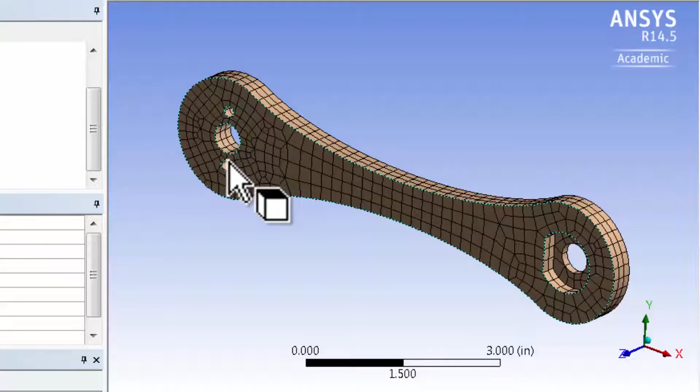I expect the regions where I'm holding these holes fixed to be areas of concern where I'm going to get stress concentration and high stress gradients. So if I zoom in over there using the right mouse button, I see that...

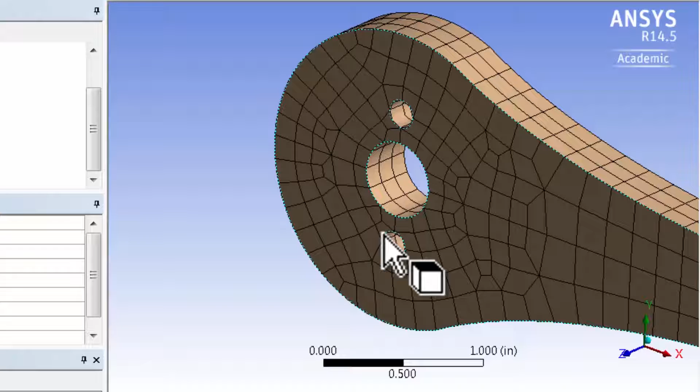Perhaps I can use a finer mesh around these holes, particularly the smaller ones. I'll do that by applying a sizing to these three surfaces. So click on Mesh Control, Sizing.

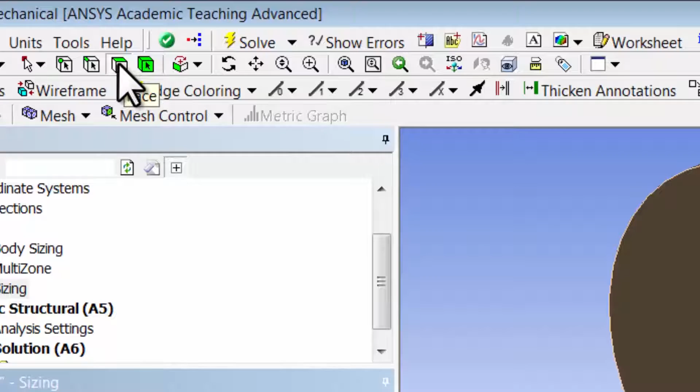We'll apply the sizing to faces or areas rather than the body as we did before. Make sure the face selection filter is selected, and then you can go and select which faces you want to apply the sizing to. So let me select that face.

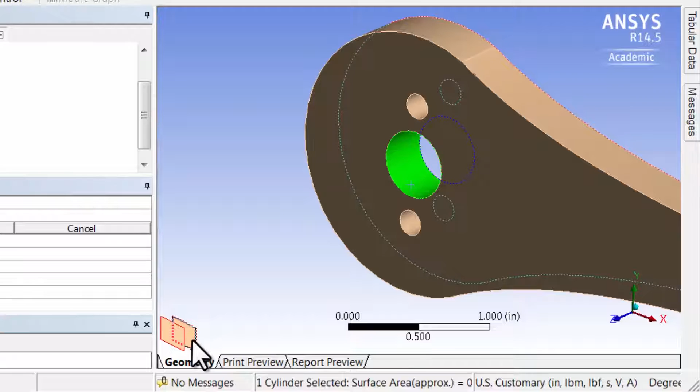You can see that ANSYS is telling me, hey, do you want to select this face or do you want to select the face at the back? And it highlights that using dotted lines. In case I want to select that, I can go there, and that is a back face, and I can confirm that by holding down the middle mouse button. Let me zoom out using the middle mouse wheel, and then okay.

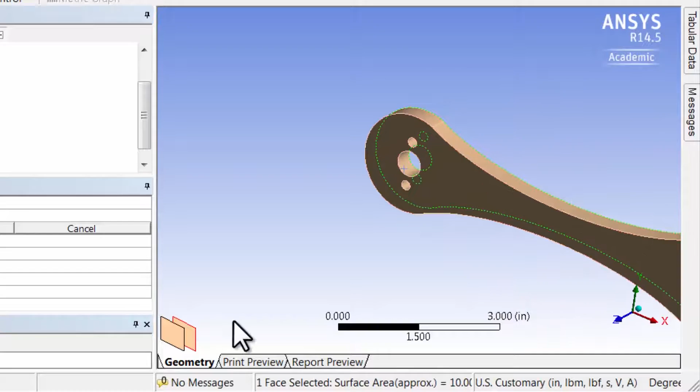That is not the face I want to select. So let me go back and select the face that I want. And if I want to go back to my original view, I can just click on previous view until I get the previous view that I want.

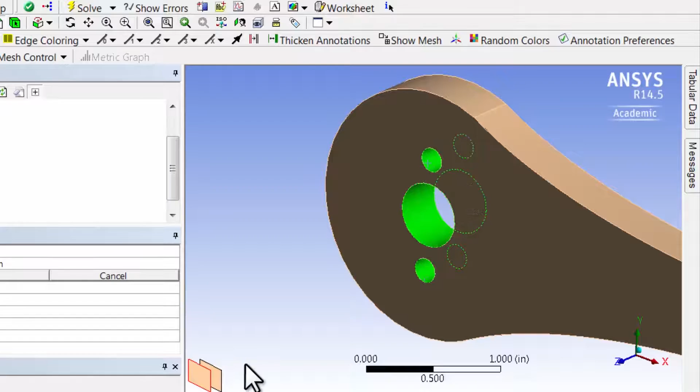Then for multiple select, hold down the control button and select this face and this face. So you've selected three faces or areas and click apply.

This sizing I'm going to apply to these three faces, and the element size I'm going to set to 0.1 inch, which is half of the body sizing that we have already applied.

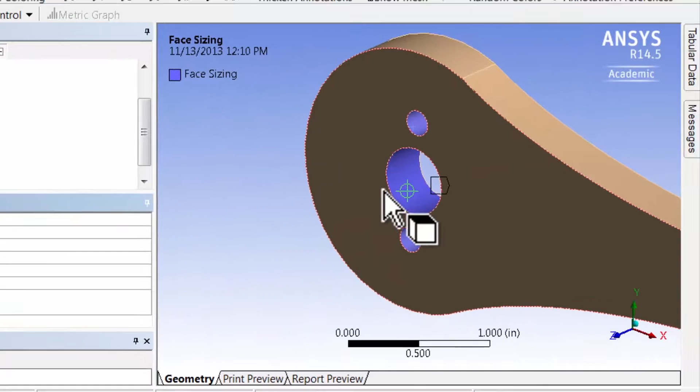If I go here, it shows me what that 0.1 inch looks like on the model. And in comparison, if I highlight the body sizing, it shows me what the 0.2 inch looks like. So you look at the circle around the bullseye. That's a handy way to check approximately what your element size is going to be.

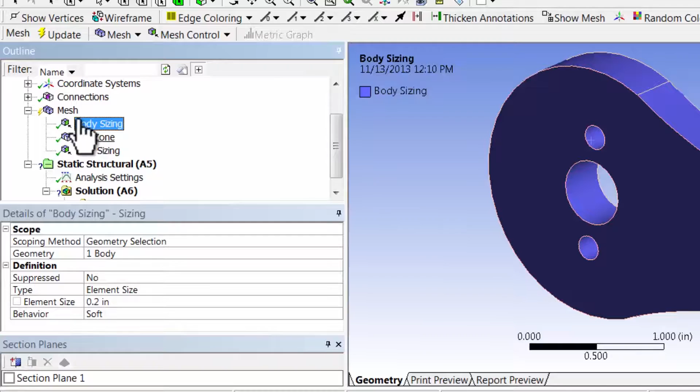So that looks reasonable. I'll say update, and that will remesh the part. And let me take a look at the mesh.

Okay, it did refine the mesh around the holes as we expect, and I can look at it closer by holding down the middle mouse button and manipulating the model.

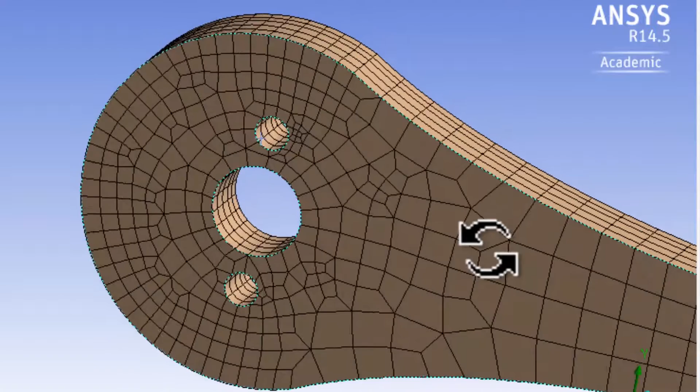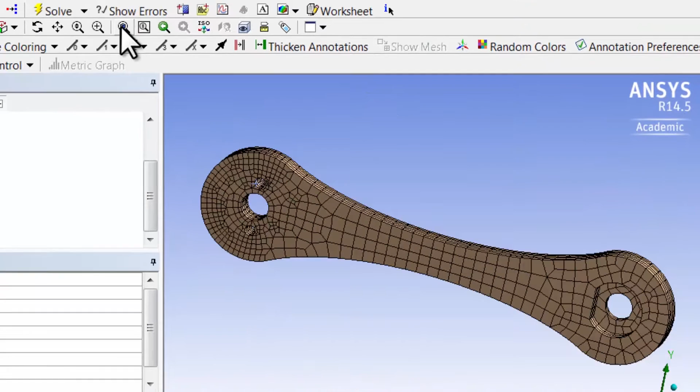But one thing to watch out for is where you have the transition from the 0.1 inch to the 0.2 inches. So those transition areas can be a problem, and that's something I need to watch out for. But if I zoom out, say I do fit model to view, that looks like a decent initial mesh.

And if I go to the mesh statistics, I see that I have about 2,500 elements and about 13,000 nodes. And each of these nodes has three components of the displacement.

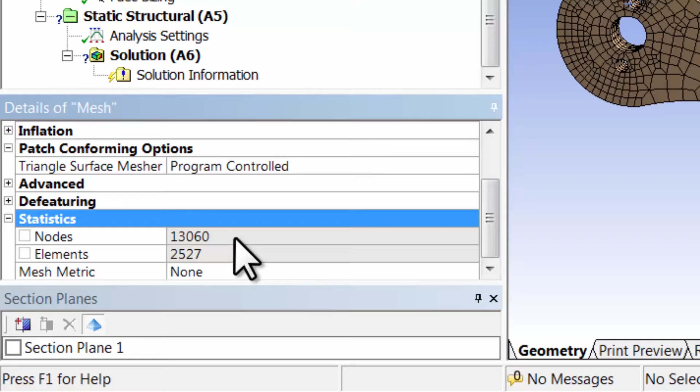So when ANSYS constructs the algebraic model, algebraic equations, you'll have approximately the number of nodes times 3. So you're going to have about 39,000 algebraic equations, and part of it you don't have to solve because you know the displacements from the boundary conditions. So it's a pretty big system that will invert.

So save the project.